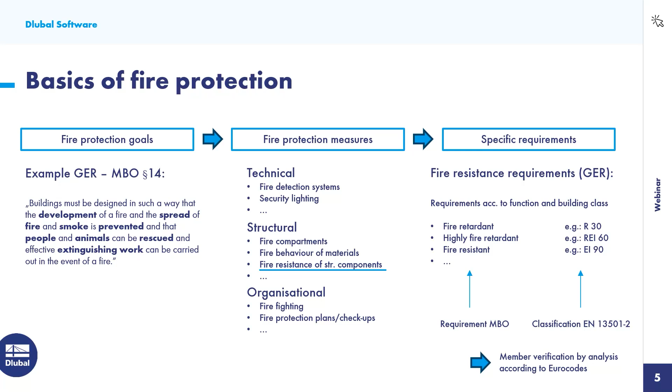So let's take a look at how fire design is regulated in the Eurocodes. I would like to start with the combinatorics. According to Eurocode 0 or EN 1990, the case of fire is to be regarded as an exceptional design situation. Accordingly, the mechanical actions are combined without partial safety factor.

The use of ψ2,1 is recommended in the main document for the leading variable action, but there are many deviations in national annexes. In Germany, for example, ψ1,1 is prescribed for leading wind actions. It is obvious that the combination rule results in significantly lower actions when compared with the permanent and transient design situation that we commonly use for the design under normal temperature.

As a safe side assumption, the loads from the code design multiplied by a reduction coefficient can also be used. However, this is generally uneconomical and therefore not recommended, especially when we use a design software that can do the correct combinations anyway, like RFEM.

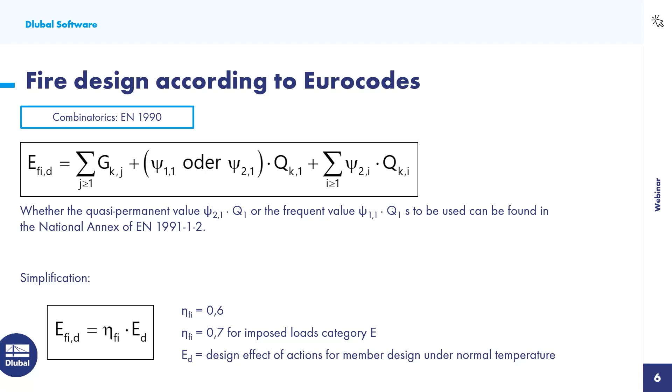In addition to the mechanical actions, the thermal action in accordance with EN 1991 Part 1-2 must also be taken into account. In the event of a fire, there's a considerable increase in the ambient temperature, and sooner or later the structural elements exposed to the fire will heat up as well. This has a dramatic effect on the material properties of steel components on one hand. On the other hand, the temperature increase can lead to indirect stresses in case thermal expansion is restrained.

Real fire scenarios develop in 4 stages. We have the incipient stage, the growth stage, the fully developed fire phase, and the decay phase. The transition to the full fire phase is called flashover and is associated with a rapid rise in temperature.

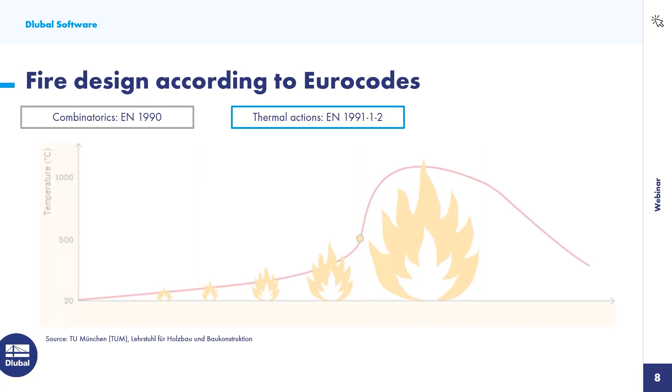For engineers, it is very challenging to accurately predict the development of a natural fire scenario. Instead of trying, so-called nominal fire curves have been established almost 100 years ago to describe the temperature development in a compartment over the duration of the fire in a simplified manner. The standard temperature curve is used for fires inside buildings. This temperature curve is also used for standardized fire tests on structural elements, which means that the behavior of typical elements under this nominal fire exposure is quite well documented and verified.

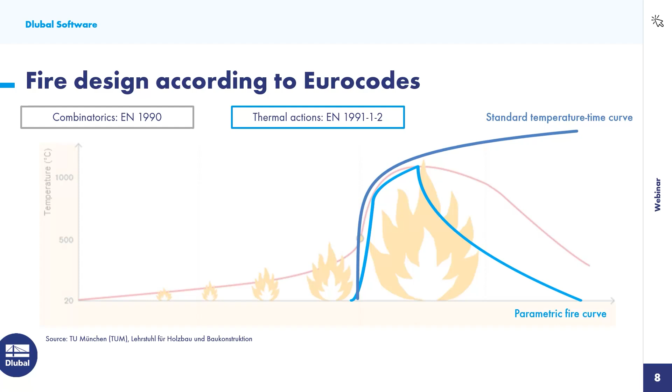Alternatively, the Eurocode also allows the use of more sophisticated approaches to predict the temperature development, such as parametric fire curves, zone models, or results from CFD analysis. The actual design of structural elements is regulated in the respective material-specific Eurocode, such as Eurocode 3 Part 1-2 for steel construction. In principle, all Eurocodes distinguish between 3 alternative methods with increasing complexity and accuracy.

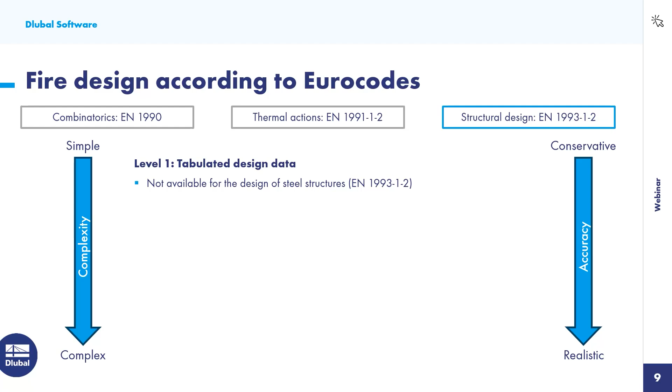The simplest design approach is design by tabulated data. This is oftentimes used for fire design of concrete elements, where it is sufficient to choose the suitable dimensions, for example, wall thickness, for a specific fire class. This approach is unfortunately not available for steel structures.

In the second level, we find the so-called simplified design methods. Here, the thermal actions are prescribed by nominal fire conditions, such as the standard temperature curve for fires inside of buildings. For such conditions, Eurocode 3 Part 1-2 gives clear rules for the design of steel members. This verification can either be done based on the resistance or based on the critical temperature.

The most accurate but also complex analyses are possible under the advanced design methods. The thermal actions are usually derived by more sophisticated methods here, such as parametric fire curves, zone models, or CFD. This enables a more economic design most of the time. The design rules are very openly formulated. Any suitable thermal and mechanical analysis model can be employed. However, the validity of the chosen approach must be proven on a case-specific basis and requires a high level of expertise.

In RFEM 6 and also RSTAB 9, the resistance-based simplified design method is implemented. A system calculation under elevated temperatures is not required in this case. The design concept is very similar to the design under normal temperatures, but under reduced load as we combine actions in the exceptional design situation. The thermal action is only taken into account on the resistance side and induces a reduction of design-relevant material properties. I would like to explain this point in more detail in the next slides.

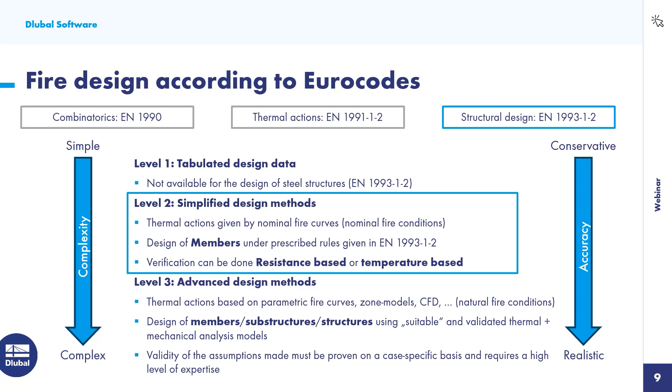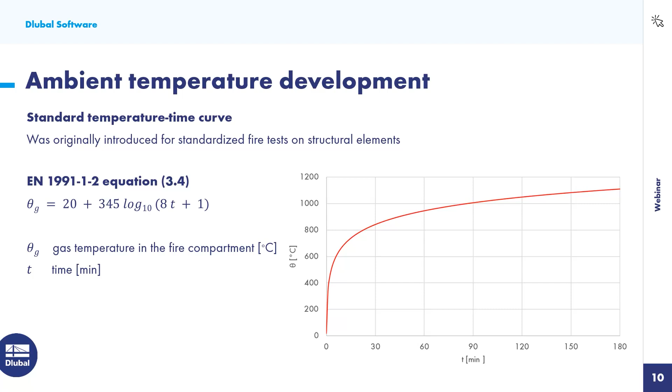As explained on the previous slide, the simplified design method is linked to the application of the standard temperature curve. This means the development of the ambient temperature during a fire is approximated in a simplified manner according to the logarithmic function shown here. The standard temperature curve idealizes the full fire phase and neglects the growth and decay phase of the fire.

So the development of the ambient temperature is specified by the standard temperature curve. However, for design purposes, we are interested in the actual temperature of the structural member. According to Eurocode 1 Part 1-2, two different components must be taken into account when analyzing the transport of heat from the surrounding hot air into the heated component: the heat flux from convection, so the exchange of heat between the hot ambient air and the cold component surface in the boundary layer, and the heat flux from radiation or thermal radiation.

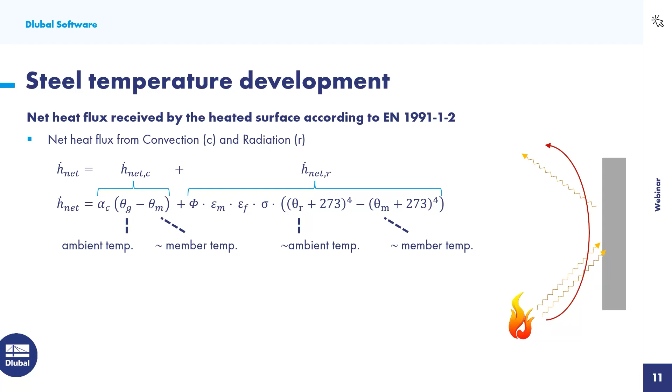I know there's a lot to explain, but I would like to leave the formula as it is right now. We will come back to the various parameters in detail later, as they are important influencing variables for fire design and any fire protection measures. For now, we take note that we can describe the relationship between ambient temperature and component temperature in the event of a fire. But how does the member temperature actually affect the design?

According to Eurocode 3 Part 1.2, design-relevant material parameters such as the yield strength and stiffness must be reduced depending on the material temperature. The yield stress only has to be reduced at temperatures above 400 degrees Celsius, but then quite rapidly, as you can see here. The stiffness already decreases at significantly lower component temperatures. At a temperature of around 600 degrees Celsius, the reduction of the yield stress already accounts for roughly 50%. At 800 degrees Celsius, it is almost 90%, so there's only very limited resistance left.

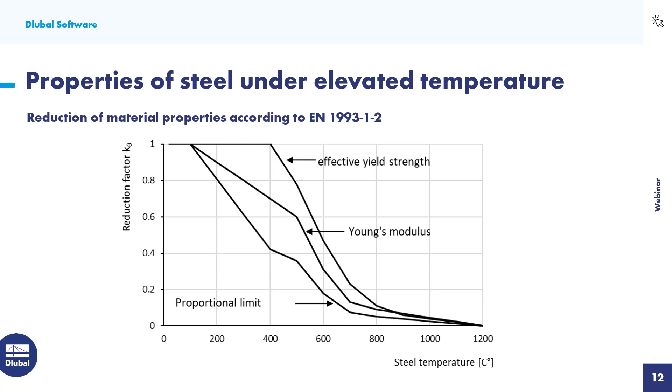Okay, so I have already prepared this simple model beforehand. It's just a simple beam with an intermediate support in lateral direction in the middle. It's an HEA 300 section and 10 meters long. I think the steel is S235. Yes. This member is already loaded by 3 load cases: self-weight of the beam itself, then dead load, an additional 5 kilonewtons per meter, and load case 3 is imposed load category B with 7.5 kilonewtons per meter.

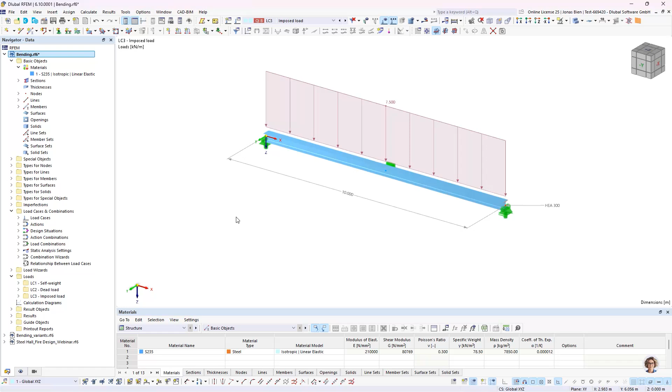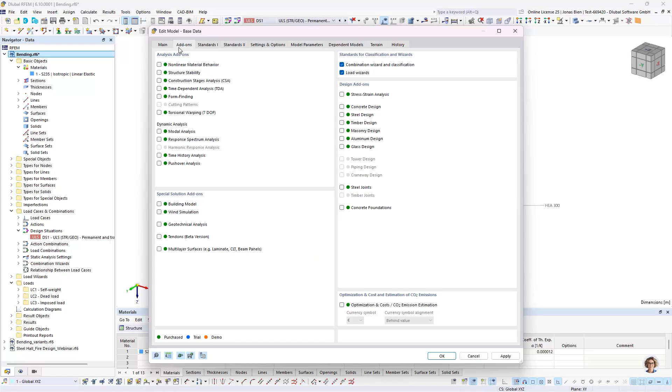I've also defined one design situation for the code design of this member, the usual combination permanent and transient, as you can see here, and this results in automatically generated load combinations. I want to start with the code design. So I switch on the Steel Design add-on, go to standards, and for now I will just use the main documents of the Eurocodes and use the common rules.

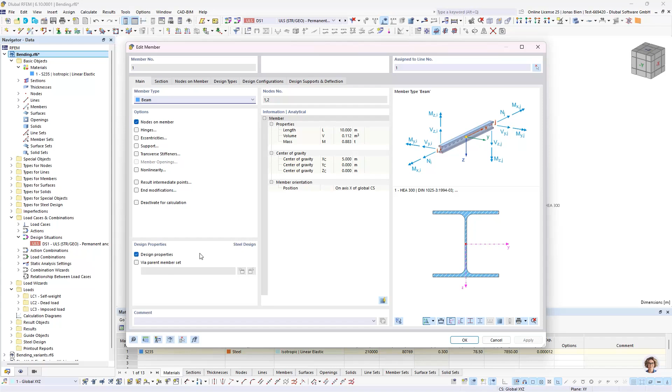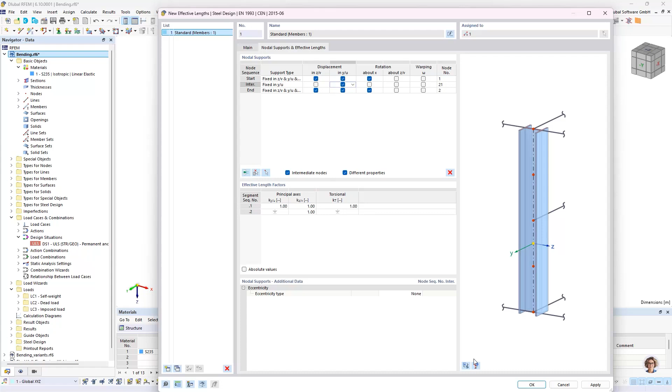Okay, and as we are used to, the design add-on has already recognized that we have this member that can be designed with our Steel Design add-on. So that's fine. Besides the section checks, I also want to do the check for lateral torsional buckling according to the equivalent member method. So I will also define an effective length, and I want to leverage the intermediate node. So I will assign a lateral support here at the middle, as we have modeled it in the global model as well.

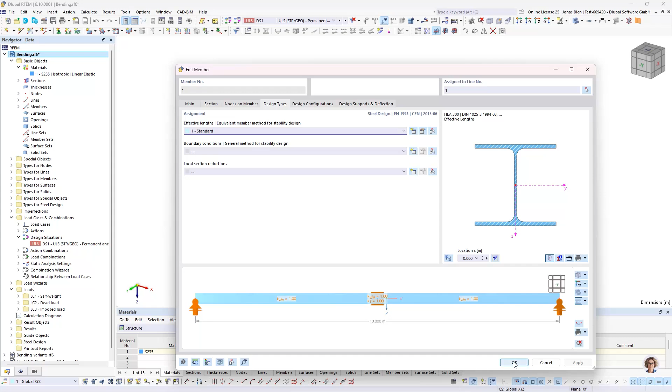Okay, so let's do this. And by the way, this assignment of the buckling length is valid for the code design and also for the later fire design that we are doing. But for now, let's start with the code design, the usual thing that we know. I will just run the simulation now, this very simple case, and we will check the utilizations that we get under normal temperature.

Okay, so as we are used to, we get section checks for shear and bending. There's also, I think, shear buckling, and since we also activated the buckling length, we also get the stability check for lateral torsional buckling. We can see that the maximum utilization is around 83%, so this is completely fine. Everything's good so far. So now let's see how this changes when we investigate the fire scenario.

So let us do all the adjustments that we need in order to activate this. First of all, we need a design situation that is appropriate for our fire case. So I will add a second design situation for the accidental load case using psi 2,1 as it is prescribed in the main documents of the Eurocode. We can again check the combination rule, and this is totally fine for us and looks like the rule that I showed you before in the slides. Okay, so I get 2 additional load combinations now for the fire situation.

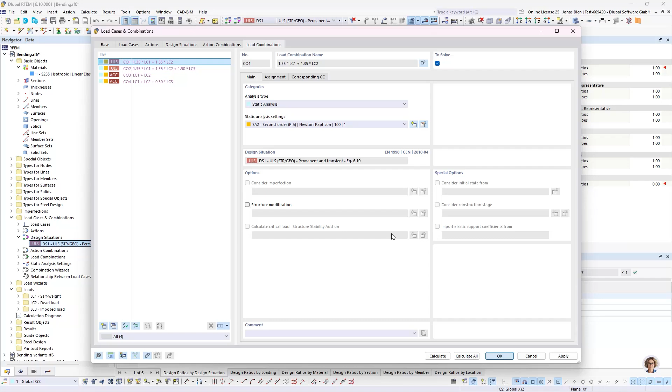And what we can then also check, because it already directly pointed me to this, is under Steel Design input data. I also want to make sure that this newly created design situation for the accidental situation is matched with the correct verification scheme. So for these load cases that are defined now under design situation 2, I want to do my fire design checks, and the Steel Design add-on has already recognized that, so it matched the design situation of the type accidental with the verification checks for fire situation.

We have to be a bit careful if we want to investigate other accidental actions such as impact or explosion or something like this. Then we would need to turn this around and do a different setting here, because in that case we wouldn't be interested in the fire design checks to be done from the Steel Design. Okay,

then we also have to define some additional settings for the fire resistance design checks. So as you can see here under design configurations that we can assess, for example, directly through the member, we have, besides the ultimate configuration for the ULS checks and the serviceability configuration for the SLS checks, for all codes that support the fire design, this fire resistance configuration.

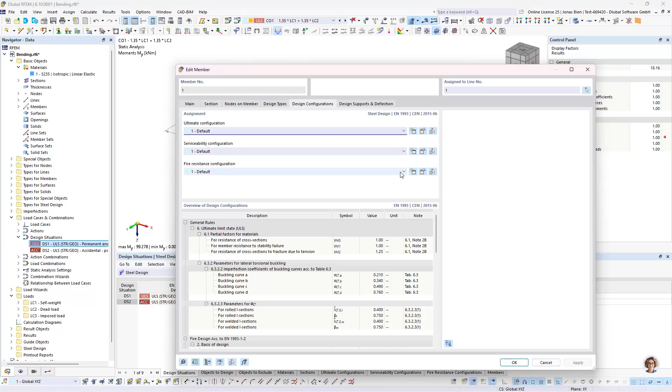And in here, we have to, first of all, define what the resistance class of my member is going to be. So at what time I want to perform my fire design checks. In this case, I would assume that my member needs to survive for 30 minutes, so it has an R30 requirement. So I will set 30 minutes as the required time for the fire resistance.

We can also see that here under the temperature curve for determination, we have by default set the standard temperature time curve, and this is the one that we want to use for internal fires, and the member design method here. We could also give a manual temperature that the program then takes to perform the fire design checks, but we want to have the temperature of the steel defined by the standard temperature time curve here. And we want to do the check after 30 minutes. The remaining parameters I will not touch yet. We will come back to this later.

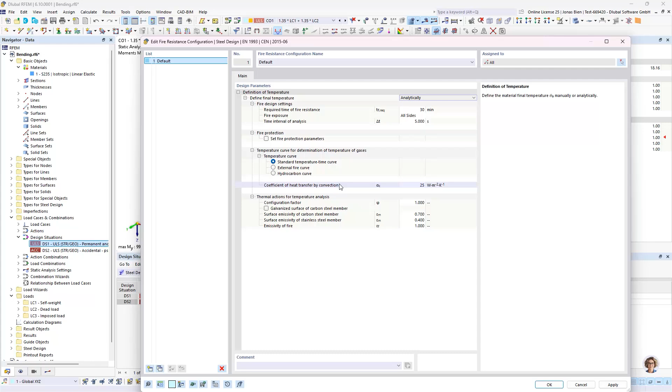So I will just assign this by clicking OK, and then I will run the steel design again. So we have to solve now the 2 additional load combinations, and then the steel design runs again. And first of all, I want to compare the forces that we now have to take for the design. So if we check the maximum bending moments for design situation 1, so for the cold design case, we have a maximum bending moment of almost 240 kilonewton meters, while in the second design situation under accidental combination, we get more or less 100 kilonewton meters.

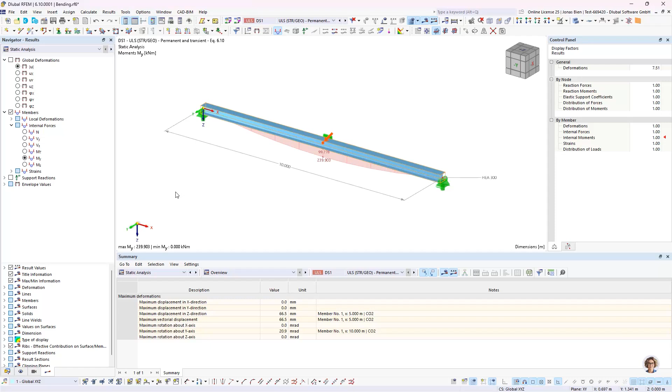So the load that we need to take into consideration in the hot design is much smaller than in the cold design. However, as we could already see, we now have a big problem with our design verification checks. The maximum utilization is over 300%. So that's not good at all. So let's check why that is, and how come the utilization is so much higher than in the cold design stage. So let's actually compare some design checks.

We could start with a bending check here about the strong axis. We will start with the cold design. So we are very used to this. We have the 240 kilonewton meter design bending moment. We do the section classification. We see we have a class 1 section. That means we can use the plastic design resistance here to calculate our utilization. And in this case, we have a utilization under 80%.

But how does this change in the fire design situation? So let's check the respective check under increased temperature. We see we have a smaller design bending moment as already shown before. And now we also have a different section class. That is interesting. And we can also check what is the reason for this.

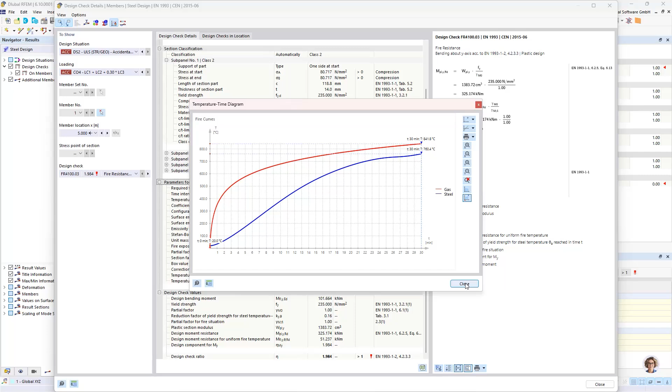There are also some other parameters here given for fire resistance. Up here we find all the settings that we have assigned to this member by the fire design configuration. And then we have some additional parameters here that I will focus on later. But for now, we can see, okay, for the cross-section checks, we have a drastic reduction of the resistance due to the increased temperature, which is very high in this case.

Maybe we can also check the stability design check, because that also reveals some details to us. So first of all, we calculate the critical bending moment the same way as we do it for the cold design. So I think this 757 should be the same for the cold case as well when we check the stability design check. Yes, it is 1-to-1.

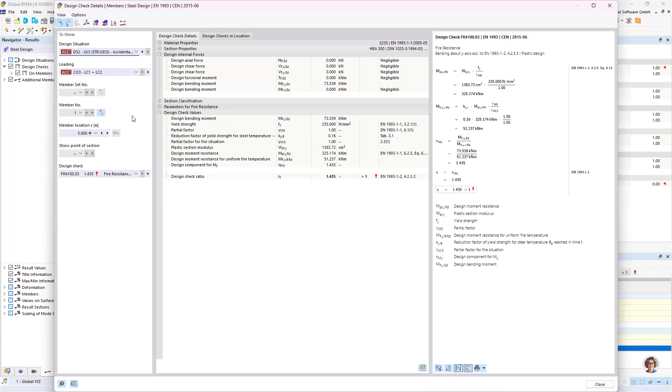But then in the fire situation, we have to again reduce it by taking into account a modified dimensionless slenderness. And in this case, this dimensionless slenderness is not only modified by the reduction factor for the yield stress, but also depends on the reduction factor of the stiffness, because of course stability design checks are also very much dependent on the stiffness of the system. So any degradation on that side will also alter our verification check for instability.

Another important point is the derivation of our imperfection factor. While in the cold case, this is dependent on the cross-section buckling curve, here it is only dependent on the material of the section. So there are slight adjustments, but otherwise the schema for the verification checks is very similar to the cold design case.

I think we can agree that our first attempt to verify the fire resistance of this beam was not very successful. So yeah, what can we do to increase the fire resistance of our beam? Of course, we could lower the loads or increase the section size, but we have seen that the member heats up very quickly and we have thus only minimal strength and stiffness after 30 minutes.

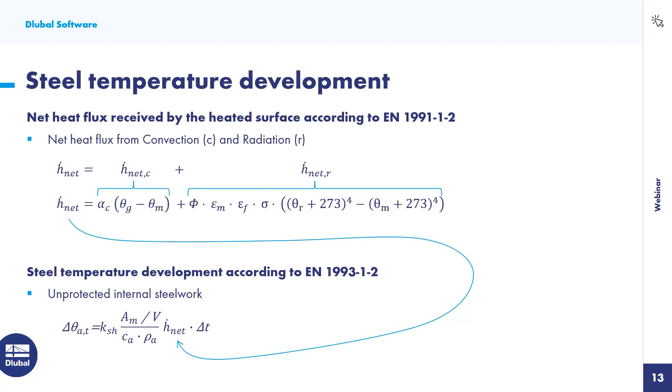To discuss possible measures we can take to delay the heating process, I would like to come back to our formulas that describe the heat transfer from the ambient temperature into the structural element. So we've seen these before, and if we combine the two formulas, we get this quite long expression here.

Most of the parameters represent physical constants that we as structural engineers cannot influence as much as we'd like to. There would be the specific heat of steel, the density of steel, the coefficient of heat transfer, the configuration factor, the emissivity of fire, and the Stefan-Boltzmann constant. Those we shouldn't touch at all.

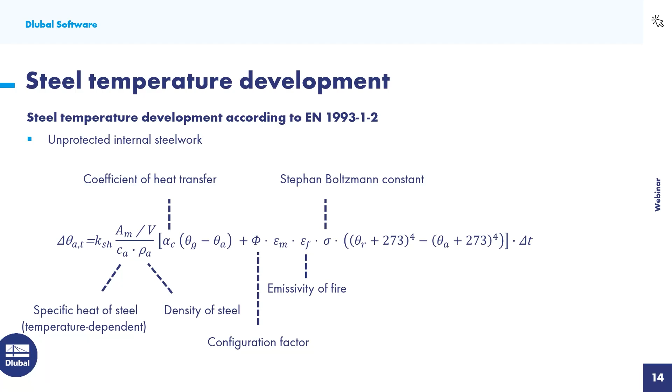However, let's take a closer look at the expression Am/V. This ratio is also known as the profile factor and describes the ratio of the cross-section surface area to the volume per unit length, or in other words, the profile circumference to the profile area in the section. So the profile circumference for the HEB 300 here would be the dashed red line, and the cross-section area or profile area would be the yellow section.

If we now compare the three cross-sections shown here, so the HEA, a bit more slender than the HEB, and then the more compact section, HEM 300, we can see that the circumference of the profile hardly changes as the cross-section parts become thicker, while the cross-section area increases significantly. This means that more compact cross-sections have a lower profile factor, as demonstrated here in these example calculations.

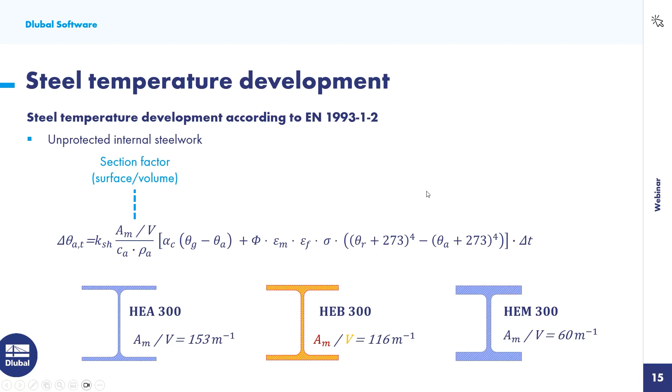And as a consequence, and since the profile factor is in the numerator of this heating equation, compact sections heat up more slowly. And we will check this in a minute in the model again.

But there are also other ways to reduce the profile factor. For example, if one side of my cross-section is protected from direct fire exposure, as shown here in the lower left figure, I can reduce the circumference by one flange width.

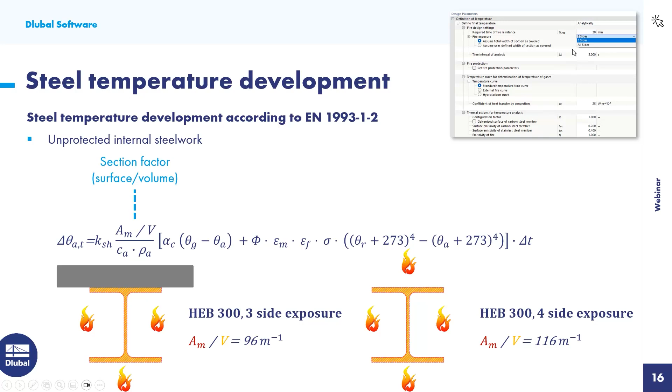So this could be relevant if we place a column next to a concrete wall or put a concrete slab above a steel girder without leveraging composite action. Such a situation can also be considered in our program through the fire exposure settings. I will also show this later.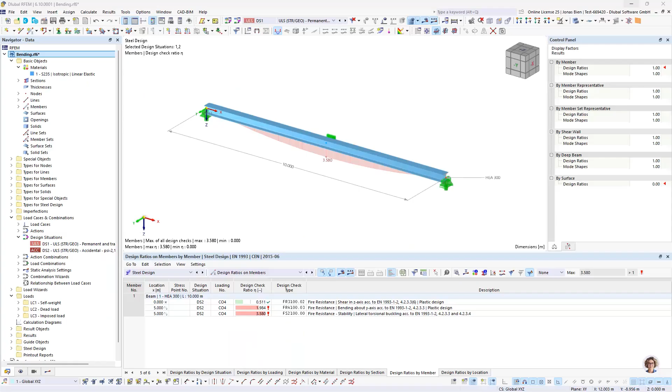Let's check if we can observe the described behavior also in our program by taking the appropriate settings. So let us switch to RFEM again. I have prepared a second model where I basically copied my simple beam HEA 300 that we discussed before and changed the section into an HEB 300 and HEM, as I've shown you on the slides. I applied the same loads and conducted the fire design checks here.

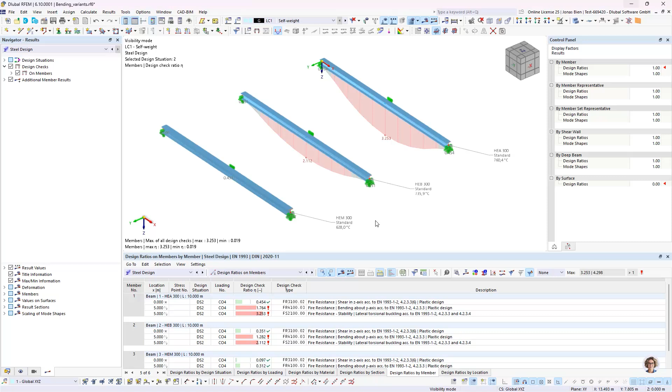And it's of course no miracle that the utilization factor for the bigger profile HEM 300 is lower. This is expected when we choose a more capable section. HEM has a higher bending resistance and also much lower slenderness, which comes into play in the lateral torsional buckling design check.

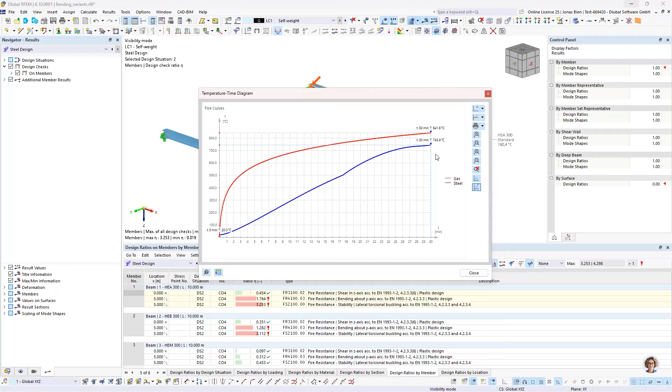But we want to focus on the member temperature and how it develops during the fire event. We have already checked the temperature development for our HEA 300, and at 30 minutes we have 743.9 degrees Celsius. The HEB 300 is only a bit colder at 735.9, but comparing this to the HEM, by taking this much more compact section we get a lot less heating. The HEM only has a temperature of 628 degrees Celsius after 30 minutes, although unprotected.

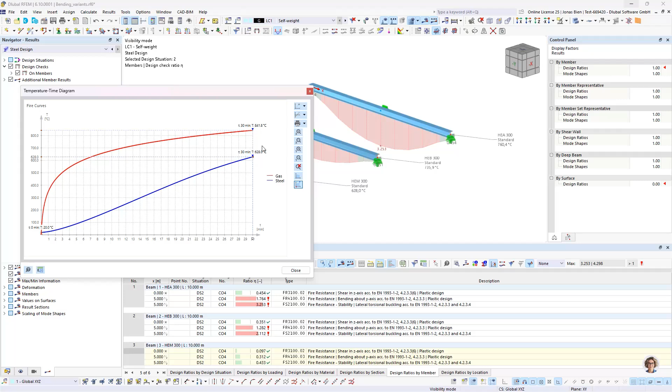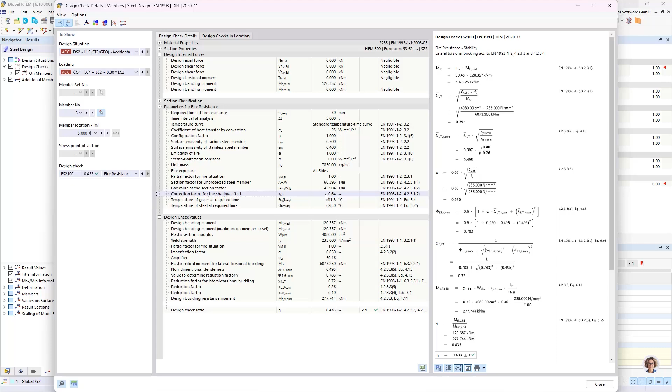We said this is because of the profile factor, and we can check this section factor in the design details for all these members. As we move on to member number 3, the HEM, we have a very low section factor, resulting in lower temperatures. We also see the correction factor for the shadow effect given in the design details.

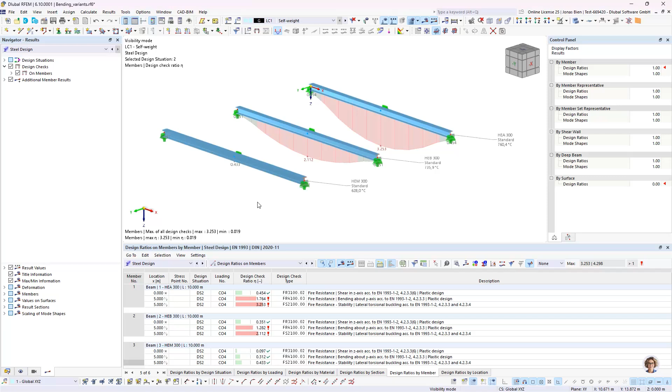Okay, we also talked about a second option to reduce the section factor, by avoiding all-side exposure to the flames, for example by a concrete slab. I added another example where I modeled an HEB 300 and modified the fire resistance configuration so that I only apply a 3-sided fire exposure. Compared to the standard case with 4-side exposure, it heats up around 30 degrees Celsius less after 30 minutes, which isn't a huge deal, but it's something.

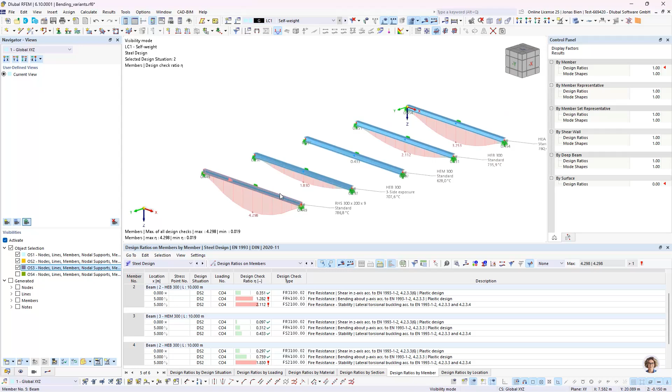And last but not least, I wanted to show the influence of the correction factor for the shadowing effect. So I incorporated a hollow section, an RHS profile, which has a similar section factor as the HEB 300 but doesn't profit from the shadowing effect. In the design details we can check the k_sh factor, and in this case it is 1.0. So we couldn't leverage any of this, and accordingly it heats up a bit more.

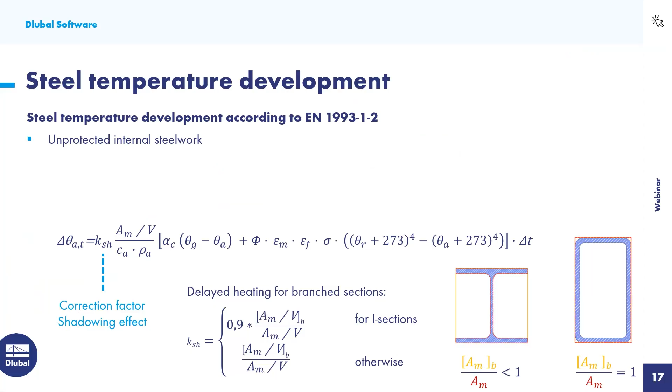Okay, that's about the section choice and how the section choice modifies or impedes the heating process of the member during the event of a fire. But there's actually another factor that we can manipulate and alter to adjust the heating process. So let's go back to the PowerPoint, to the next slide.

Yeah, I would now like to discuss this factor here, epsilon m, which describes the surface emissivity of the member, not of the flame, but of the member. And this factor describes how large the proportion of absorbed radiation energy is. An ideal black body has an emissivity of 1 and absorbs all incoming radiation in theory. An ideal white body has an emissivity of 0 and reflects all radiation. Real surfaces have values between 0 and 1.

Although this sounds highly theoretical, we are all very familiar with the relationship between surface emissivity and temperature development from real-life experience. So imagine on a sunny summer day, it is much nicer to wear a light-colored shirt than a dark one, as it reflects a greater proportion of solar radiation and does not heat up as much. That sounds good, but you might ask, what does that have to do with our steel member? And here we actually have the possibility to change the surface properties by galvanizing it.

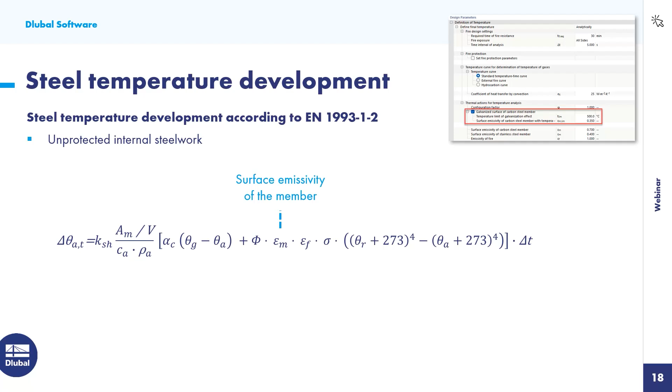So as part of a research project at the Technical University of Munich, it was discovered that galvanized steel has a significantly lower emissivity than non-galvanized steel. We can leverage this effect at least up to a member temperature of 500 degrees Celsius, and only for shiny zinc coatings that we get for hot dipped galvanizing category A and B steels.

If I am correctly informed, this additional regulation has already been included in the draft of the second generation Eurocode. In Germany, this option has already made it into the majority of state building regulations via an additional guideline published by the Institute for Hot Dipped Galvanization, named the DASt Guideline 027. So we can also take this galvanization into account in our program. I think it's simpler if I show it to you just in the program. So let's just jump back.

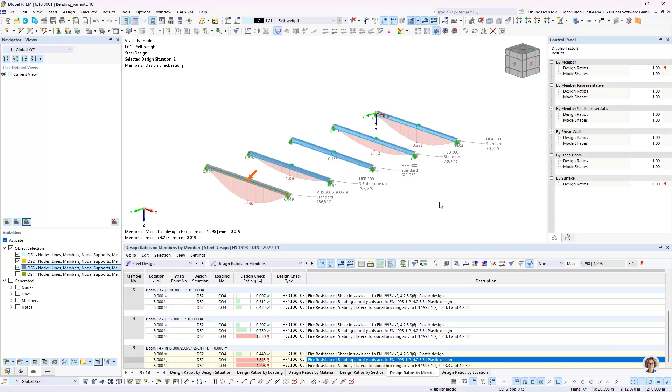And now I want to modify the selection of the members that I have modeled up front. So I again have copied all of those members that I've shown you before, different sections, and also the HEB with the three-sided exposure, and modified the fire design configuration in such a way that I also changed the emissivity by galvanizing the surface of the carbon steel. I can do that by just activating this option here, and then it actually also takes into account this limiting temperature of 500 degrees Celsius, and until then uses a lower surface emissivity.

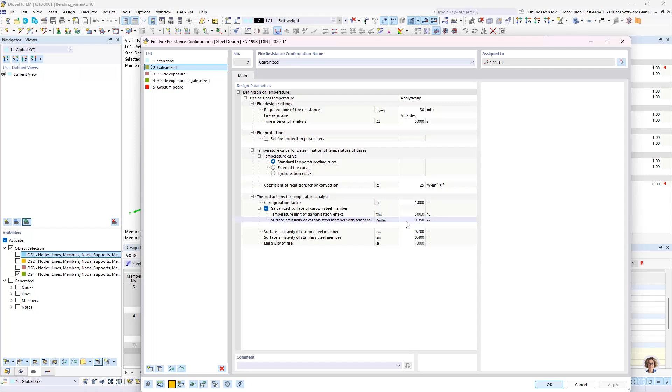Okay, so let's see how this again affects the heating up of the member. We can see for HEA it does not have such a huge effect. Same goes for the HEB300. Let's actually look into one of those diagrams, because it reveals the fact that the emissivity changes at a temperature of 500 degrees. So as we can see here, there's a significant dent in this curve, and this is at a temperature of 500 degrees Celsius and marks the point where the emissivity jumps from 0.35 to 0.7.

For the HEM profile, actually the influence of the galvanization is very, very huge. Instead of a temperature of 628 degrees Celsius, we get a temperature that is almost 150 degrees lower after 30 minutes. And that's mostly because for the whole 30 minutes, we are below a member temperature of 500 degrees Celsius, which means that we, until the end, can leverage the lower emissivity of the member surface. And then, of course, the benefit is much greater, because it's more or less the integral of the heating over the time.

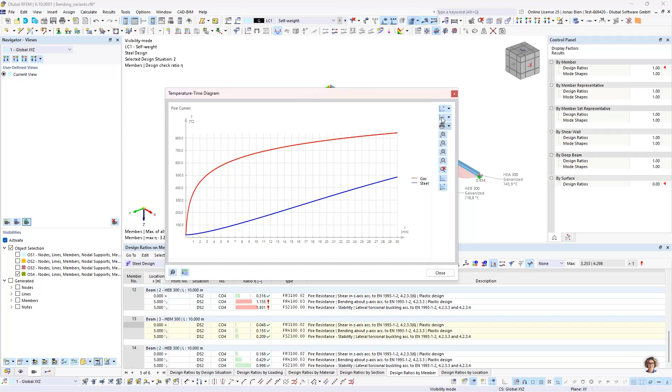But it is also interesting that, for example, when we consider an HEB300 and maybe anyway have one side of the section covered by, for example, a concrete wall, and we then take into account additionally the galvanization that we might anyway have because of corrosion protection measures, we see that we can reduce the member temperature from 736 degrees to 633, and under this temperature we are even able to fulfill the verification checks, and instead of a maximum utilization of 200 something %, we go under 100. So without any additional measures in this case, we could already fulfill our fire verification checks.

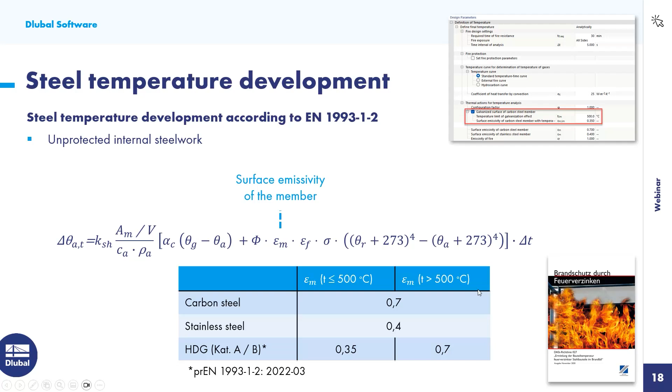All right, last but not least, let us talk about conventional fire protection systems. Therefore, I would like to switch back to the PowerPoint presentation. So, as said earlier, the possibility to improve the fire resistance by galvanization is very interesting, as many steel structures are galvanized anyway for corrosion protection, and in this case, the improved fire protection is a nice bonus. But conventional fire protection systems exist as well. They have a much higher protective value, and they can also be taken into account in our program. We can take into consideration spray plaster or board encasement.

And such systems can be taken into account by using an alternative formula provided by the Eurocode 3 part 1.2 for the temperature development in internal steelwork that is insulated by fire protection material. In addition to some of the parameters that we have already introduced earlier, the properties of the fire protection system are also taken into account. So we have the thermal conductivity of the fire protection system, the thickness of the fire protection system, and the specific heat and the density of the fire protection system.

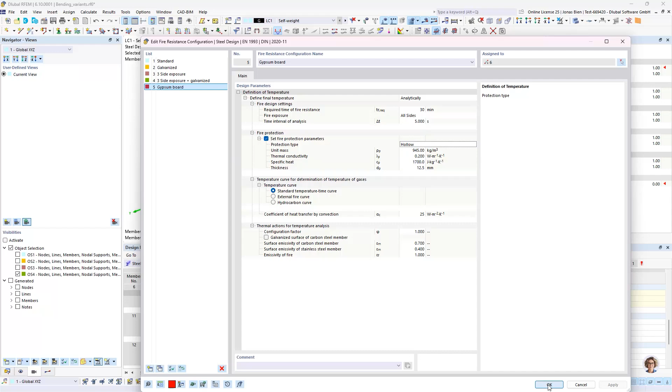And what I can see is that this has a dramatic effect on the temperature. So in this case, by the encasement, I get a very low temperature after 30 minutes, below 300 degrees Celsius. So higher fire resistance classes of R60 or R90 can also easily be realized with such sophisticated fire protection systems. Okay, we have now dealt extensively with the fire design assessment of a single member and checked how we can influence the temperature development in that member in the event of a fire.

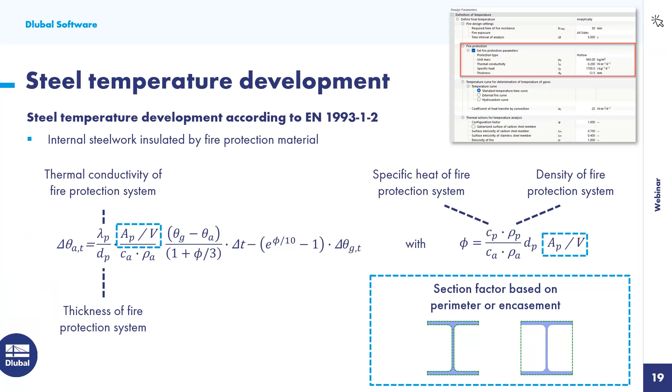Okay. So in Eurocode 1, part 1.2, section 4.2(1), it is written that indirect actions from adjacent members need not be considered when fire safety requirements refer to members under standard fire conditions. And then there is also the clause in Eurocode 3, part 1.2, section 2.4.2, that the effects of thermal deformations resulting from thermal gradients across the cross-section shall be considered. The effects of axial or in-plane thermal expansion may be neglected, though. And because the formulas that we use to determine the heating of our section always assume that we have a constant heating over the section, we don't need to take into account the thermal deformations at all.

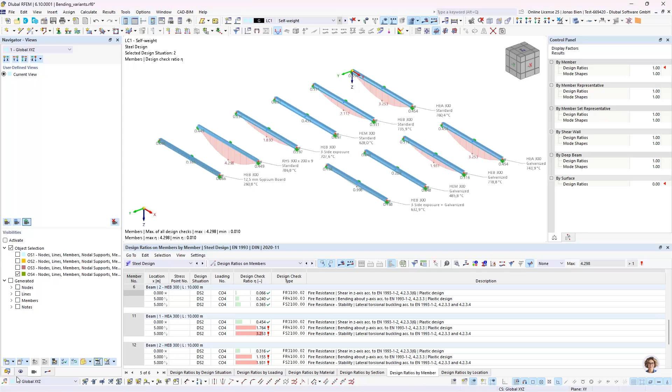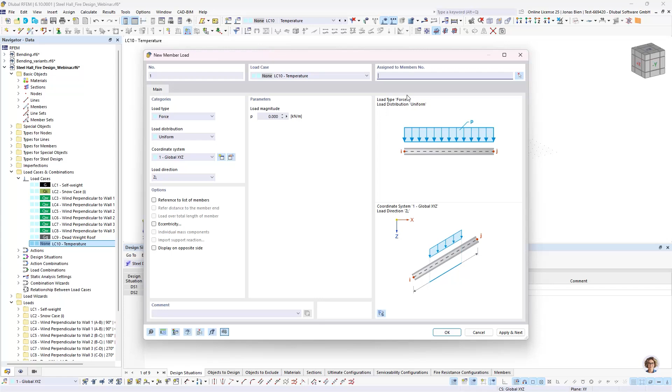So I want to go ahead and create a new load case for this temperature load. In this load case, I think it's sufficient to do it here. We want to analyze the effect of the thermal expansion. So I create a load case 10. Let's name it temperature. And in this load case, let's say we aim for a 30-minute fire under a standard temperature curve that would give us an ambient temperature of around 800 degrees Celsius.

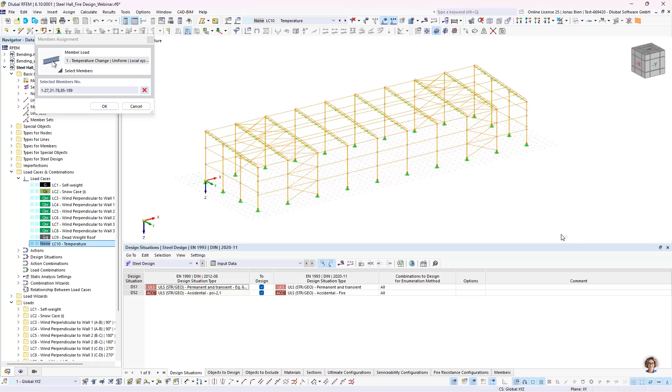I have many sections here. Of course, they would all heat up differently, but I will now, just on the safe side and for demonstration purposes, apply a uniform temperature change to all members of 800 degrees. So that's just some assumption. Okay, so I select all members and apply a constant temperature increase over the section. And now I could just run this analysis and calculate the resulting reactions under this temperature increase.

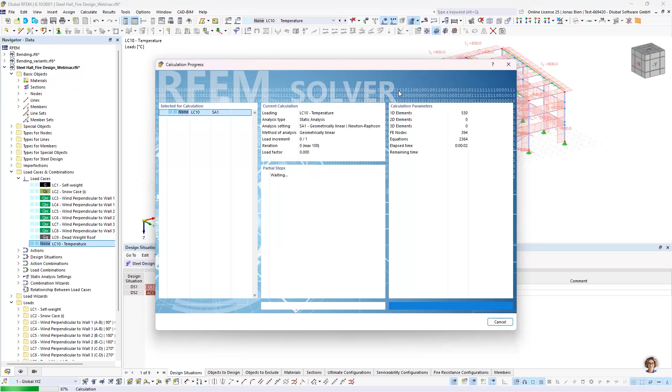And I would be actually shocked because, as you can see here, we get very large restraining forces. As I already mentioned, the steel wants to expand, and we have in this steel hall bracings in some of these bays, and the compression members between those braced bays cannot expand very much. So the thermal deformation actually goes into axial force, and we get a very huge compressive action in these members.

But now we have to consider one thing. Eurocode 3 Part 1-2 says that we have to also modify the mechanical properties of the steel at elevated temperatures, and we can take this effect into consideration as well. When we remember the diagrams we looked at regarding the properties under elevated temperatures, we do not only decrease the strength of the material with increasing temperature, but also the stiffness. And the lower the stiffness, the lower these restraining indirect actions will actually be.

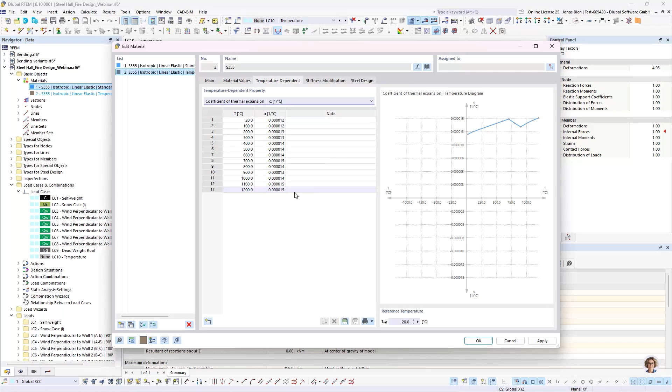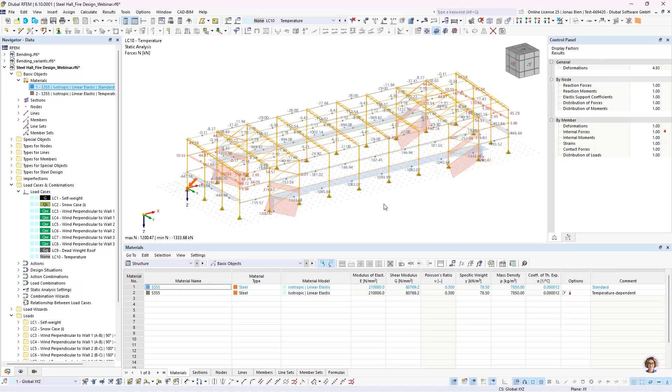Also, the coefficient of thermal expansion is dependent on the temperature, and I can take this into account as well. Now let's see what happens if we actually take the temperature-dependent material into account, and how this affects the indirect actions that are generated under elevated temperatures. We remember we had in the first attempt compression forces of over 1 meganewton. Now we go into the simulation again with the temperature-dependent material.

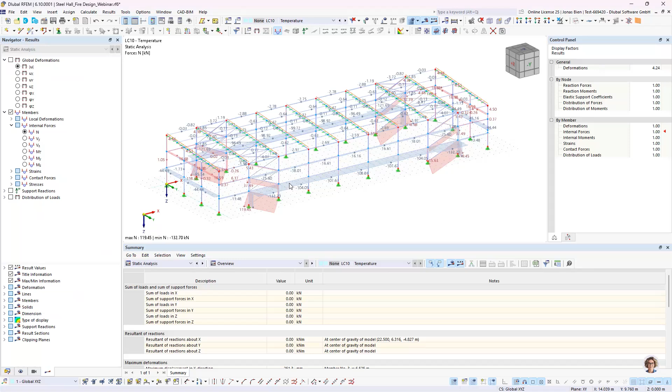Let's wait a bit, but we should see that those compressive forces are very largely reduced. Yeah, we can see that it is almost reduced by a factor of 10. So now the compressive force that's left over at the temperature of over 800 degrees in the member is around 100 kilonewtons.

So whenever we want to take these effects into account, we always have to remember that not only do we have these restraints that add some actions into our model, but we also at the same time have the degradation of the material properties, which in this case help to lower these restraining forces in the model.

Okay, so that's it for that question. Let's move on to the next one.

How can we modify buckling length and boundary conditions for the fire design situation? Eurocode 3 Part 1-2 allows for reduction of buckling length in some specific cases. Such design situation dependent modifications of the buckling length can be taken into account with our construction stages add-on, and I want to quickly show you the necessary steps how to set this up.

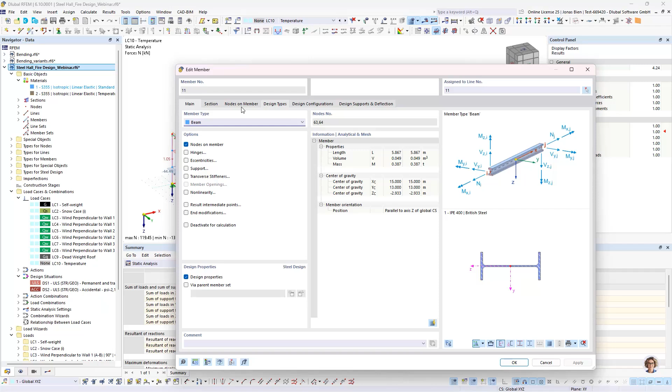So let's go back to the program again. I don't want to go into a detailed explanation of the construction stages. There are some additional webinars that you could look into if you're interested, but just show you the procedure, how can we modify the buckling length. So in this model, I think there are some buckling lengths for those columns here applied, for example, and we want to change them for the fire design case.

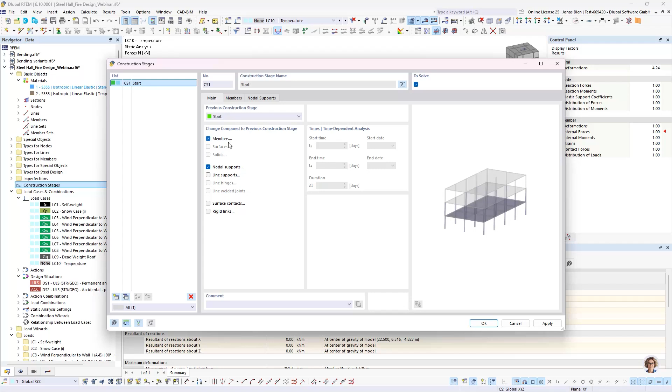So I activated the construction stages add-on, and I create a new construction stage where I want to activate basically all my objects that are relevant for my analysis. So all the members and nodal supports. I don't have any line supports or surface contacts or rigid links. And then under the member tab, I can not only activate or deactivate members here, but I can also modify them. And for example, I could now say, okay, this column here,

for this column, I want to define some steel design configuration, for example, the effective length settings. And I could now override my original assignment of buckling length with a new one. Let's just take for demonstration purposes the type 2 I have already defined. But it could be every effective length type that I have maybe modified from the original version.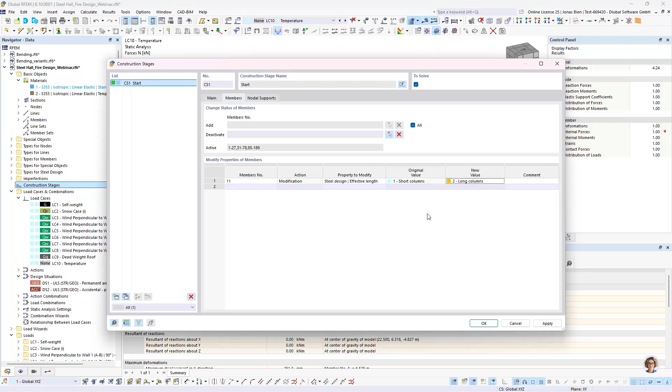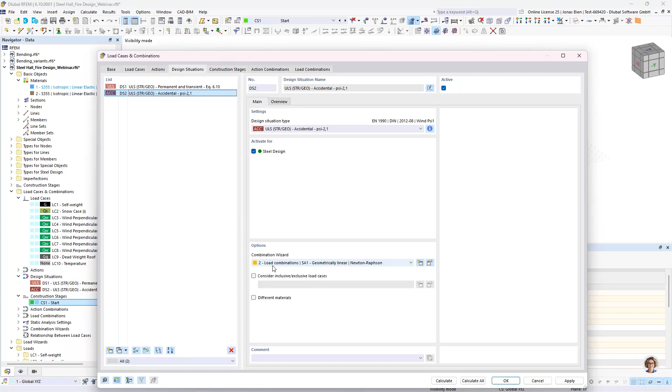Okay, I apply this with OK, and the thing I then need to do to assign this construction stage to my design situation 2 is that I need to apply all the load cases to this construction stage, and the easiest way to assign the construction stage to all load cases that are generated in design situation 2 is if I modify the combination wizard. So let's just copy the first one actually.

And now in this case, we want to consider an initial state. And this initial state is defined as our construction stage 1. I apply this with OK. And now let's see how those load cases look like. And I can see for all the generated load cases, construction stage 1 is now considered as being active. And that also means that the buckling length modification would be active.

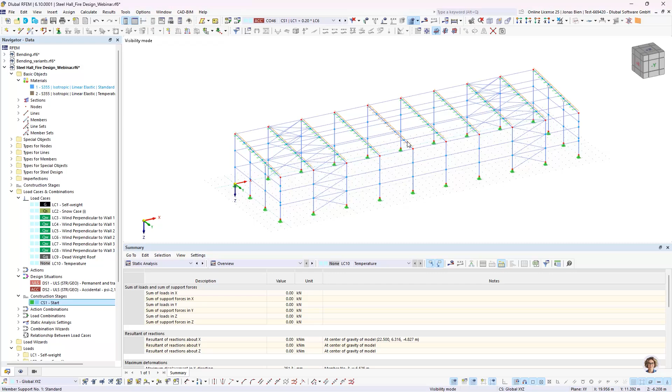A second scenario would be that you may want to change a boundary condition for the stability checks. For example, in this case, when I want to leverage the rotational restraint of these girders in the cold design case, I may wonder, if it comes from a trapezoidal sheeting, if I should take this beneficial effect of the trapezoidal sheeting also into account in the fire design scenario, because if I imagine that there's a fire in this steel hall, these trapezoidal sheetings heat up very fast because they are very, very thin, just 1 or 2 millimeters.

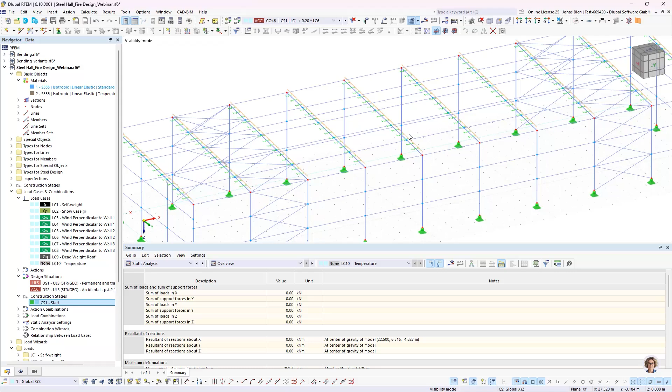And as we learned, the material properties degrade very fast, and I wouldn't have a lot of stiffness that helps me in my lateral torsional buckling design check in the fire design situation. So if I want to be on the conservative side and don't want to use this beneficial factor in the fire design situation, I could also deactivate these member supports in that case. And that can be done via structure modification.

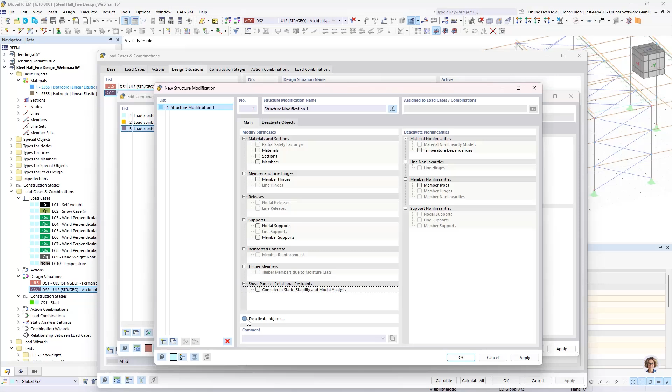I could assign the structure modification also to the combination wizard. That would be the most elegant way to have it active in all the load combinations that are then automatically generated. So I again open the combination wizard and now also in addition activate the structure modification. And in that structure modification, I want to deactivate specific objects. In that case, I want to deactivate the member support, and to tell the program which member supports I want to neglect, I need to create this object selection.

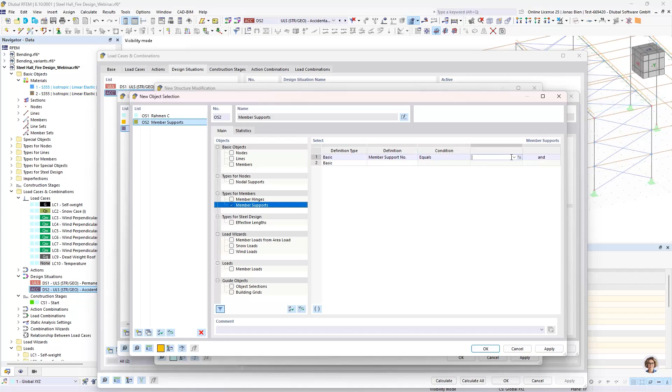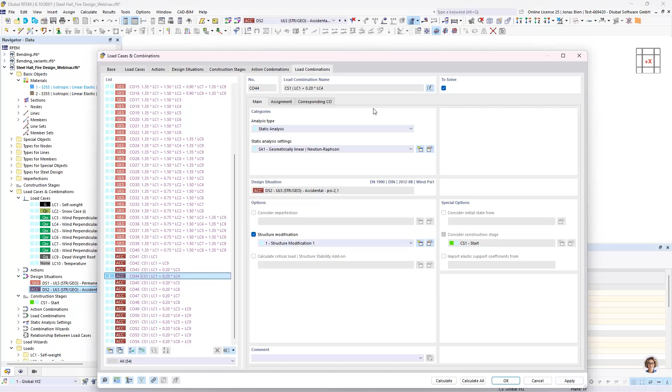And here I can, for example, select the member supports by their number. And I can also select the member supports I want to deactivate graphically. I need to make them visible first. Here we go. And in this case, I would also take into account the structure modification. And again, all the generated load cases and load combinations would have not only this construction stage where I modified the buckling length, but also the structure modification where I deactivated those rotational restraints here for the stability design of those girders.

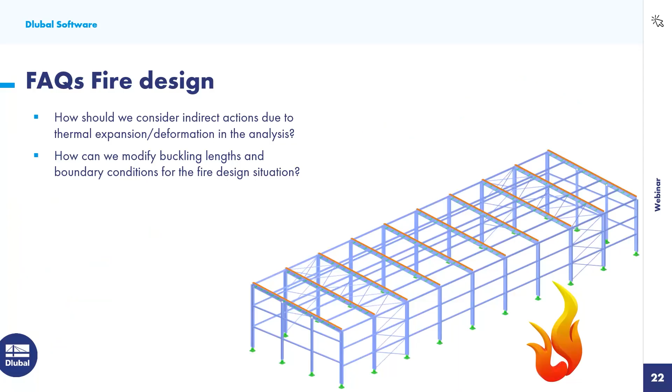So I could do all of this. I am actually not sure in which cases I would do so, because the Eurocode also has a paragraph on how to take the boundary conditions into account in the fire design situation. And it actually says that the kinematic boundary conditions at supports and ends of members applicable at room temperature may be assumed to remain unchanged throughout the fire exposure.

So this is just if you want to change something to be on the conservative side, you know how to do that. I have shown you now, and it's a bit engineering judgment if you want to modify those in the event of a fire.

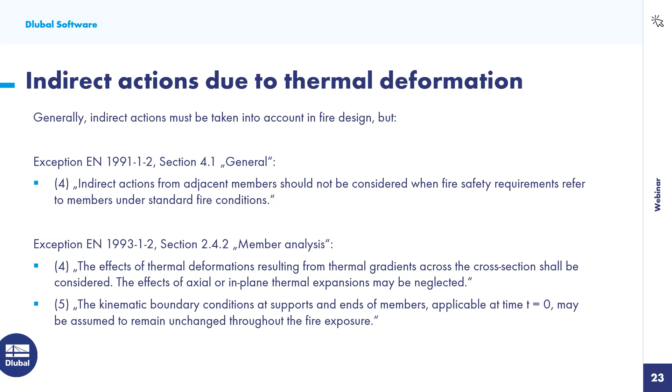Okay, the third question considers the verification of steel joints. Of course, when thinking about a complete steel structure, we should not forget that we also have to verify the joints besides the members. And in RFEM 6, we have a dedicated add-on called Steel Joints for the verification of joints. But unfortunately, the design under fire conditions is not considered therein, at least not yet.

But the experience from real fire events shows that joints are often not problematic. This is mainly due to the local mass concentration caused by welded-in sheets or stiffeners and bolts in that area. And the increased mass means that the joint usually heats up much less than the connected members. We also have significant shadowing because of these additional plates usually, which also affects the heating process.

As a consequence, the Eurocode 3 Part 1-2 provides very simple rules for the verification of joints that you can leverage under elevated temperatures. And I think this is sufficient in many cases. So under section 4.2.1, it says that the verification of joints can be considered settled if the fire protection system used for the joint is equivalent or better than the fire protection system of the joint members. And the second condition is that the utilization of the joint should be lower than the utilization of all the joint members under normal temperature.

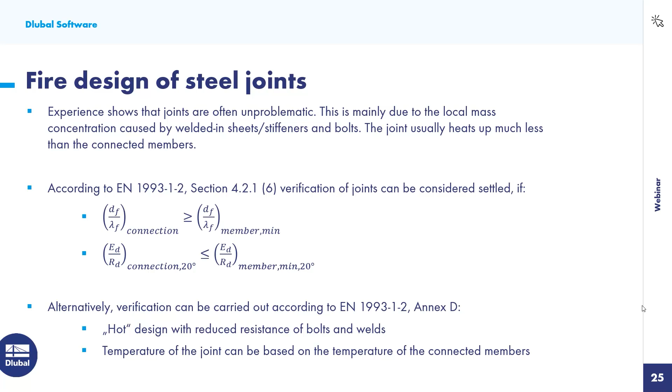The last question I want to tackle is how can I calculate the critical member temperature? This is also raised quite often. As I explained initially, the simplified member verification can be done resistance-based or temperature-based. And for now, we have only implemented the resistance-based approach since it is generally more economic and has a wider range of application. However, we are currently working on the implementation of this critical temperature calculation as well, as many customers are requesting this feature. So I hope I can give you an update on this very, very soon.